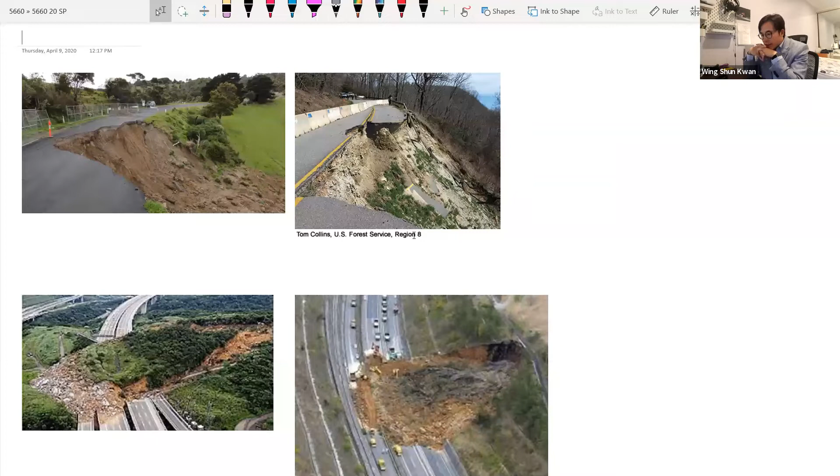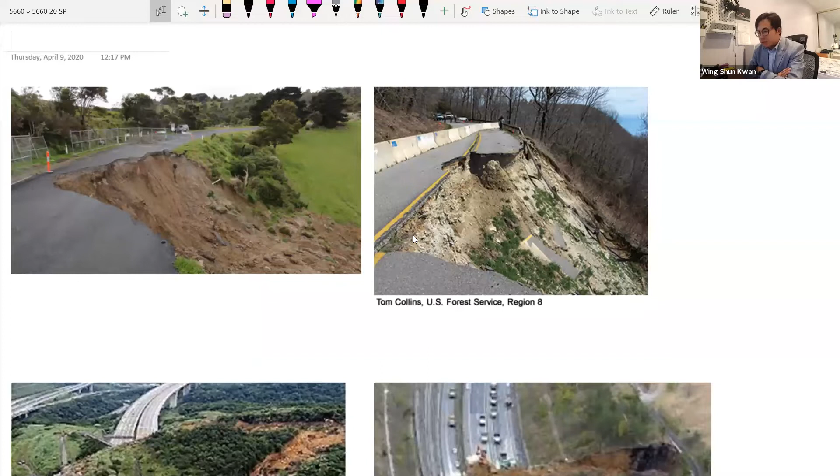On the slide I show some pictures of failures, of what may go wrong. I don't have the site names for these, I just Googled them quickly, but I want to give you an idea of the scale of the mass failure. It could be a small scale slope problem, happening at your backyard, or on a small road out in the countryside, an area where the road malfunctions but there's no casualty or loss of properties.

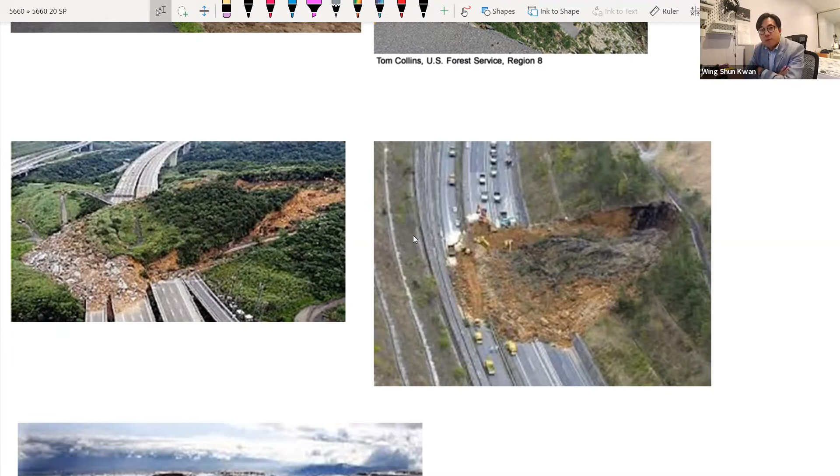This is also a huge concern in the mining industry, because at mining sites we push the limit. We want a cut as deep as possible to maximize profit. Mining sites are often very risky because we push the limit, wanting to go as deep and as far as we want, and as a result we get a very steep slope, which ends up failing.

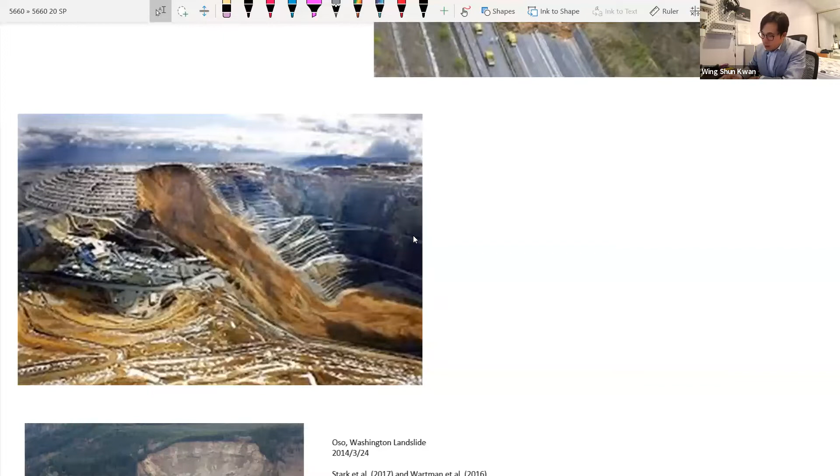I put up a case history for some of you if you want to read about it. On Canvas I uploaded two papers regarding a case history in the United States, a relatively recent one. It happened in 2014 in Washington. That was also the time I was doing my PhD at Texas, and everyone was talking about this case history when it happened, and I had a lot of time to dedicate to understanding what was going on.

In Washington in 2014 there was a landslide, massive enough that Americans, or people on the West Coast, really felt the pain of it. If you want to learn more about this case history, I uploaded two very well documented papers on Canvas, so feel free to read about it.

So now the question is: why did this happen? What is the cause of slope failure? So why does this happen? Any guess? Why does a slope fail? What would be the potential cause? Anyone? Any guess? Just because it's old enough and it fell?

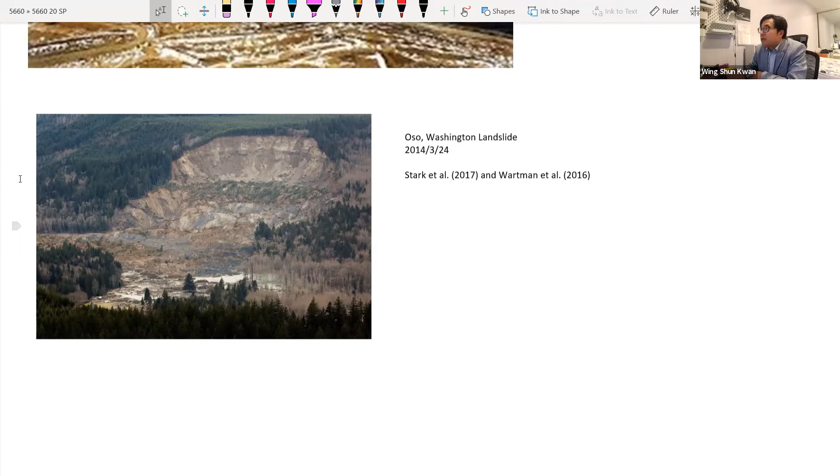And loss of strength - why does loss of strength happen? The ground is the ground, so why would there somehow be a loss of strength? Anyone? The case history of Washington also happened after heavy rainfall.

Rainfall-induced landslides may not be much of a concern in Southern California, but it will be a concern in the northern part of the West Coast where there's more rain, and also in some tropical areas near the tropics, which get a lot of rain during the summer - that could be the concern. Yes, underground water table, very good.

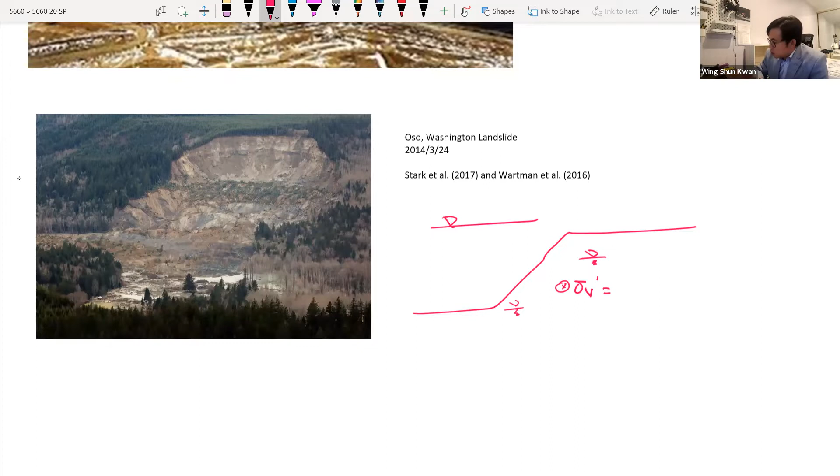When a lot of rain happens, the groundwater table rises. Let's draw a slope: if the groundwater table goes up because of the rainy season, the effective stress right there would change, because effective stress equals total stress minus pore pressure. So if there's a rise in the water table, will the effective stress go up or down? It will go down, right?

So if there's a rise of groundwater table, would the pore water pressure go up or down? It will go up, right? So if that goes up, what happens to your effective stress? It will go down. And shear strength is a function of the effective stress.

So if the shear strength goes down, your soil strength will go down too. Simply, if there's a rise in the groundwater table, that could also trigger slope failure.

This becomes a very typical geotech problem. No matter if you have a recent cut because of civil engineering activities, you're concerned about the slope. You need to do a slope stability analysis to design for earthquake scenarios, and because of changes in groundwater table, all these natural or mankind activities cause you to think about slope stability, and we need to do analysis on that.

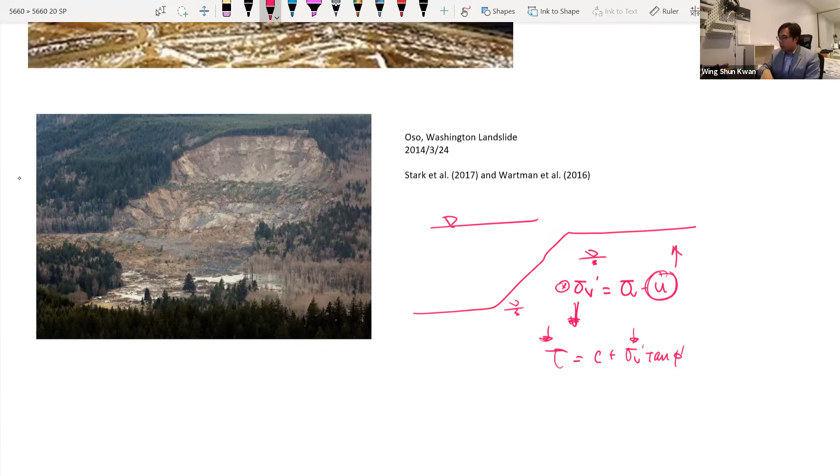So that will be what we'll be working on this topic.

So the best reference for this lecture is the Duncan and Wright book. Oh, I don't have it on my bookshelf here. But anyways, the Duncan and Wright book is a classic reference.

Wright is pretty much the one who redid the UTexas program, which is a very relevant computer package to do slope stability analysis.

But in this course, I highly recommend you understand the basics, rather than just diving into a computer package and doing a slope stability analysis over there.

I highly recommend you understand all the fundamentals, because the computer packages change. Ten years from now, there may be other types of software that come out, and even when you get into new software, in order to run the analysis properly, you need to understand the fundamentals.

You're given all these options, like different analysis methods: the method of slices, the Spencer method, the block method. You also need to input parameters, like undrained or drained strength parameters, and use either total unit weight or submerged unit weight, phi or phi prime, C or C prime.

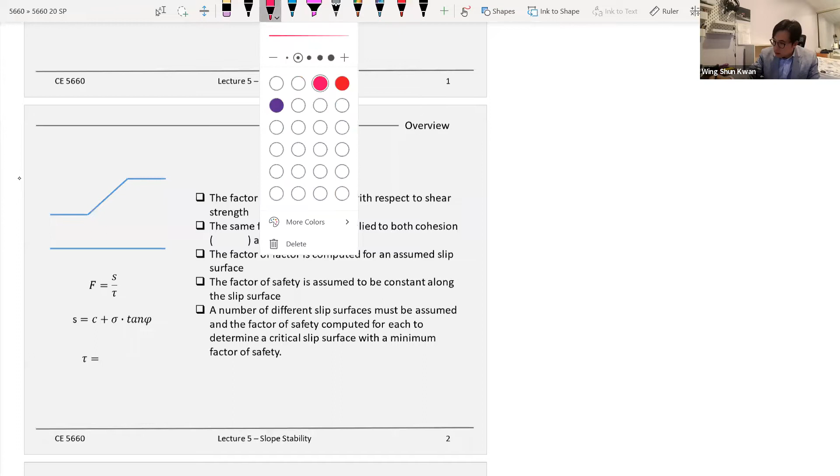A deterministic analysis means you define one case scenario at a time. So when a slope fails, you define one critical slip surface. It's a circular slip surface, which means you have a center point with a known radius. Yes, is there a question?

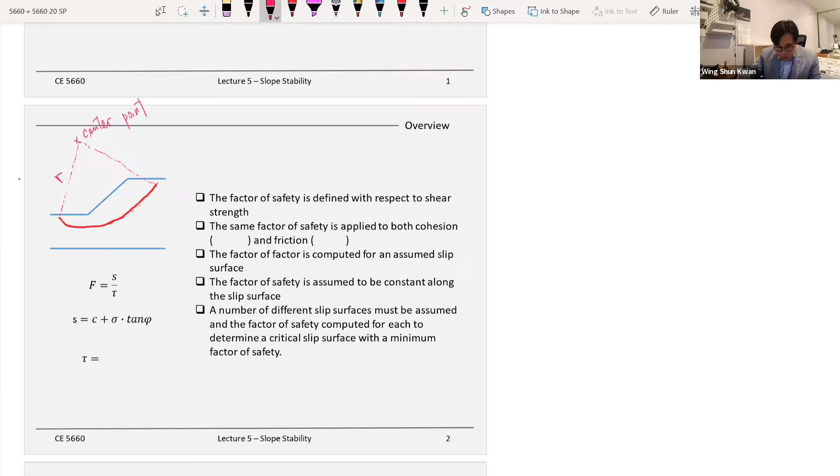So you know the radius, and this is your slip surface. We define one critical slip surface.

And we use a typical factor of safety type deterministic approach. So the factor of safety would equal the soil strength divided by the demand. The resistance is the soil strength divided by the shear stress, which is just the driving force. And for the soil strength, we can make use of the Mohr-Coulomb criterion.

But now it can get complicated, and you need to think about which kind of parameters you should use, drained or undrained.

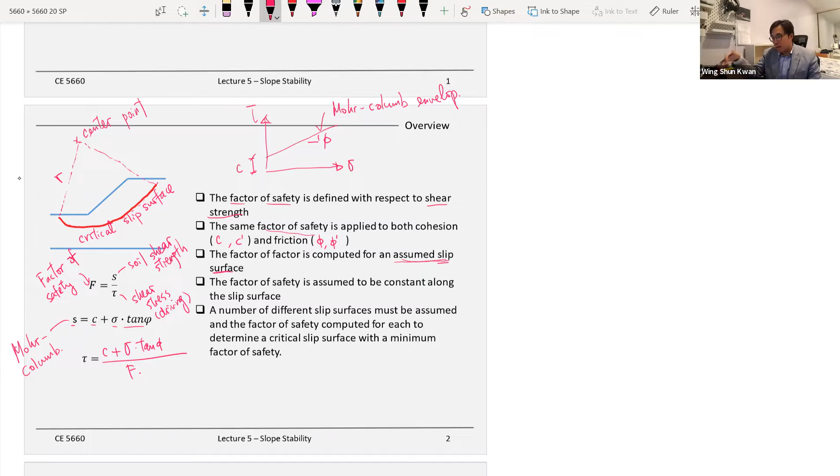There are some engineering procedures to handle this, we'll talk about this later. If you use any computer package, what they do is trial and error. They will try maybe thousands of different circles going through a site, and then identify the lowest factor of safety, and that becomes the critical slip surface. But if you do it by hand, there are some recommended procedures to do it. Before going into using any computer package, I highly recommend you understand the fundamentals.

What type of parameter you should use, and when you use the program, you have a bunch of different options to choose, which give you different methodology on calculating the factor of safety, or how to create geometry and the failure mechanisms. Think about all this. So start from the basics, and then the next step we will do any computer aided analysis for this topic.

The other fact is we make simplifications. This is a deterministic analysis, so we just pretty much assume worst case scenario. We assume the factor of safety is constant along the whole slip surface. And if you do it for practice, the procedure is you need to try a couple of different slip surfaces, until you find the critical one with the factor of safety to be the minimum.

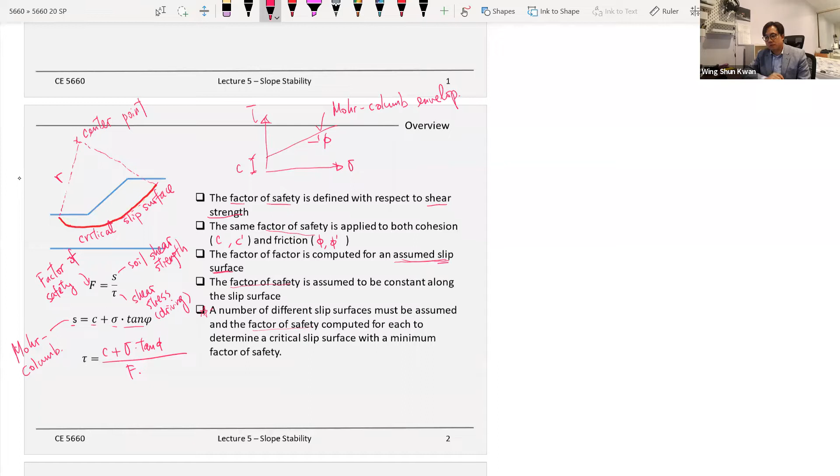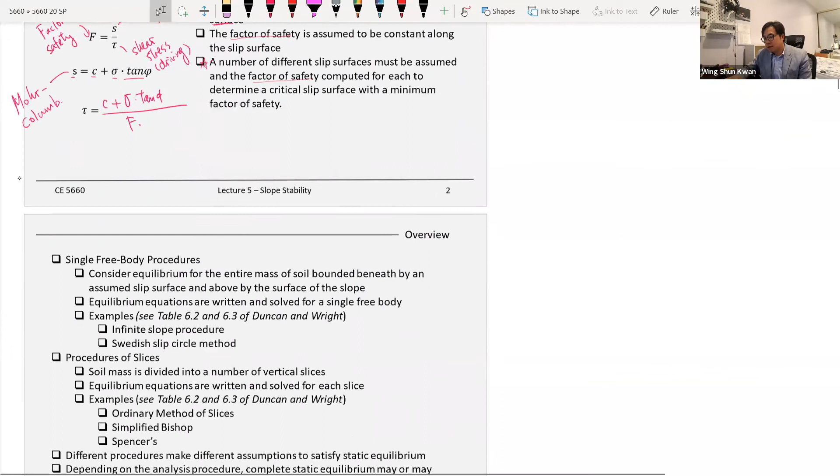So that's the overview of slope stability analysis. And the next thing we need to talk about is, in fact, there are many different procedures, different approaches to do it. So geotech engineers should go beyond this, just become equilibrium static problems, understanding that each different procedure has its assumptions and shortcomings, and to know which one to use.

When you do it by hand, you pick the most suitable one, and if you do it through a computer package, you need to understand which kind of approach you choose. And when you write a geotech report, you cannot just say I find the factor of safety to be 1.5. You need to tell the whole story. The factor of safety is determined by what method, through which computer package.

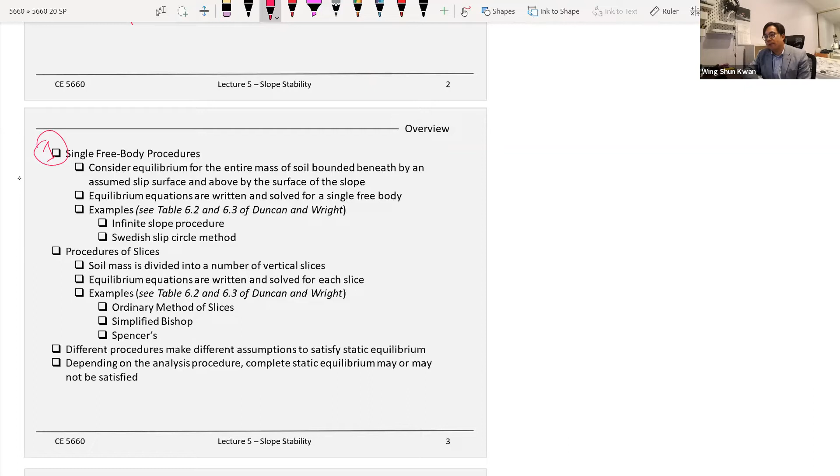Which means we need to understand each of the procedures, and there are many of them. But we can kind of characterize them, the category of them. There's two main kinds: first is the free body, single free body procedure, and the second category is the procedure of slices. So there's two different main approaches, and from those two approaches, there's many different methods.

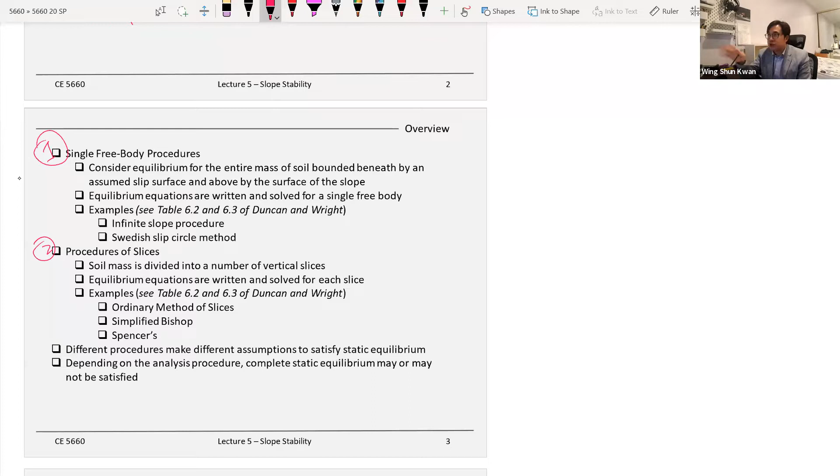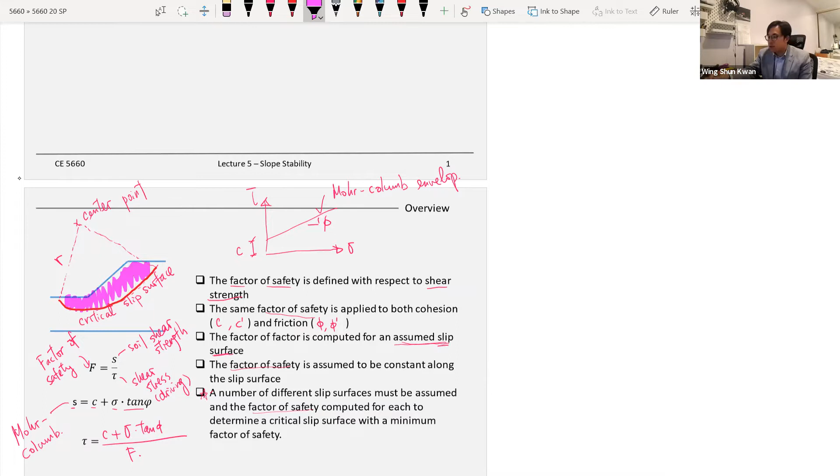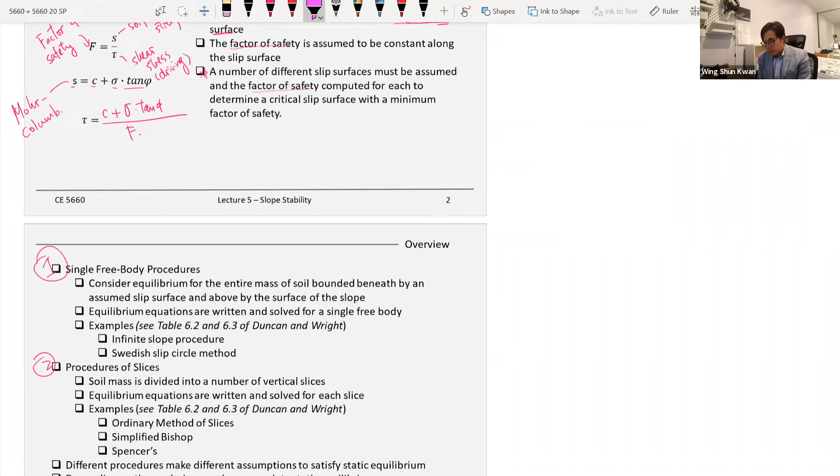So first, for the single free body procedure, you assume the whole mass, the whole mass right here. The single body means this one, the whole mass here above the critical slip surface, they move together, they move together. So you consider equilibrium conditions of the failure. Assume the whole thing moves together, and also this type of procedure, the equations are written and solved as a single free body, kind of like the static problems that we have been working on.

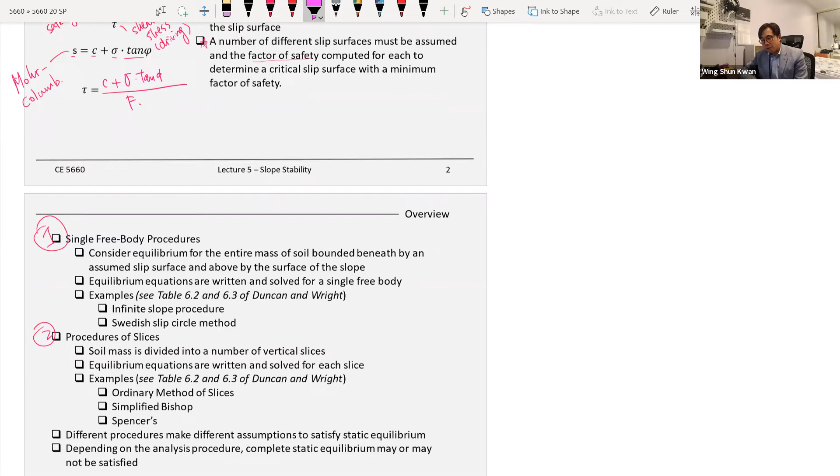And there's a different approach. First, the first approach, or this methodology, is the infinite slope procedure we'll talk about next, or the Swedish slip circle method.

So Northern Europe has the famous geotech problem, quick clay, which is a very weak soil, across the country. That's why in the early days they were at the leading edge of studying the strength of soils and slope stability concerns. If you go to YouTube, you can search for quick clay. Maybe next lecture I can play a quick clip together and watch some failure case histories. When it fails, it's quite dramatic. The whole site just falls down.

The Swedish people, in the early days, had a lot of engineering procedures and were at the leading edge on this matter. They developed a method using the single free body procedure. They call it the Swedish slip circle method. We will talk about this too.

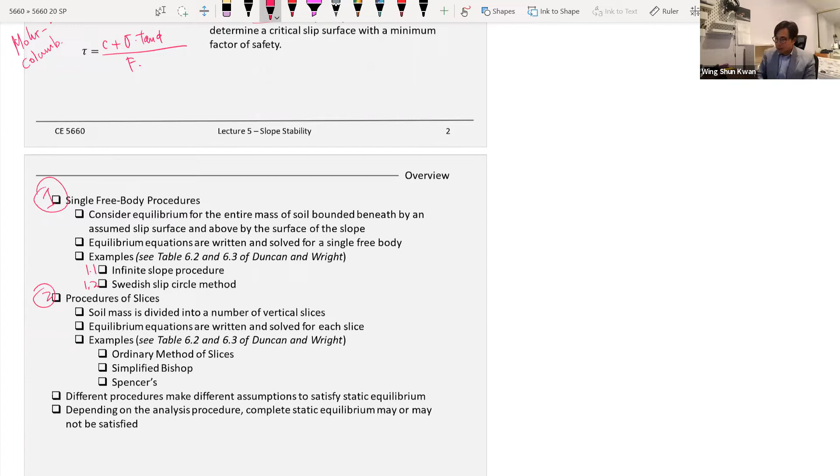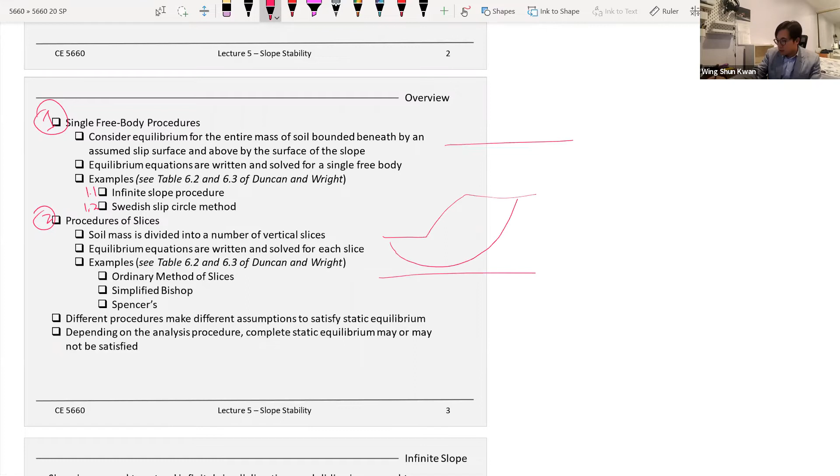The next general procedure people use is called the method of slices. The nice thing about assuming the whole circle as a single free body diagram is it's pretty much a straightforward procedure - you assume the whole thing moves together. The method of slices instead cuts this into different slices for equilibrium analysis. They have vertical slices, and equilibrium equations are written for each slice.

The advantage of the single free body procedure is it's simple, quick static analysis with a quick answer. In the early days, before the computer era, maybe the 1910s or 1920s, before even World War I, everything was done on paper. So the single free body procedure made sense then.

But when computers started kicking in, even before conventional OS systems, when there were punch cards and DOS systems in the 40s, 50s, even 60s, the computation power picked up. Then this type of iterative procedure, where you find the equilibrium from one slice and move to the next, passing on the static equilibrium calculations, became feasible. Then the method of slices became more and more popular.

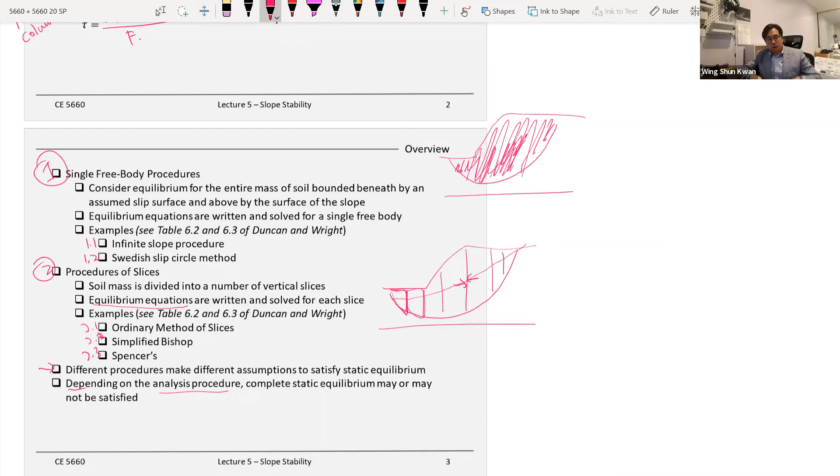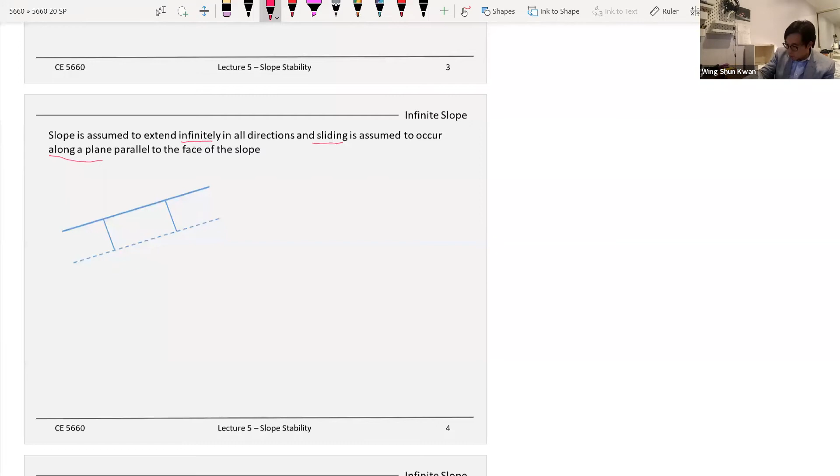First, let's talk about infinite slope. Infinite slope is the assumption we use when failure happens in a layered type of situation. It's assumed to extend infinitely in all directions, and sliding occurs along a plane parallel to the face of the slope. This only happens for cohesionless soil.

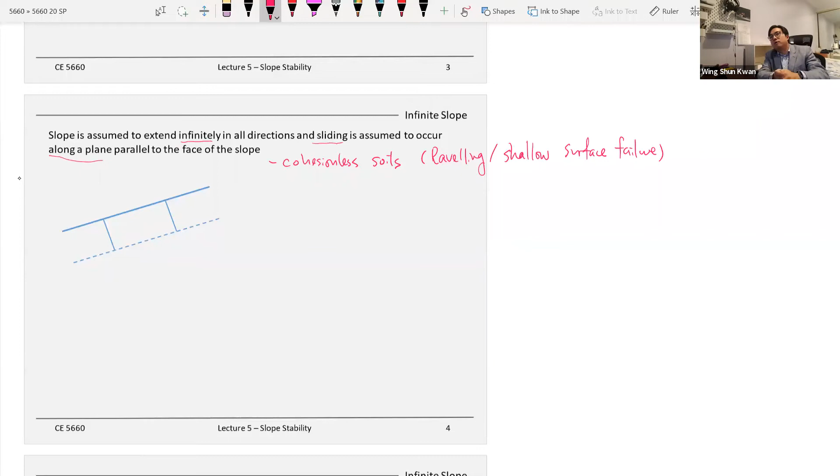So when you have sand and gravel, when failure happens, it could be ravelling or shallow surface failure where a layer of material slides off. This pretty much only happens for cohesionless gravel or sand slopes. When you have a clay slope, very likely you get a circular critical circle type of failure.

So for infinite slope problems, we can use this approach. That's why when you become a practicing engineer, if you have a clay site, this type of failure won't happen. So this is... I got a question there.

It could also happen when you have sliding parallel to the slope surface - the slope face. For example, a block of soil over rock. When you have a very smooth contact, the whole plane slides off. This approach can be used too, and very likely it's just cohesionless soil.

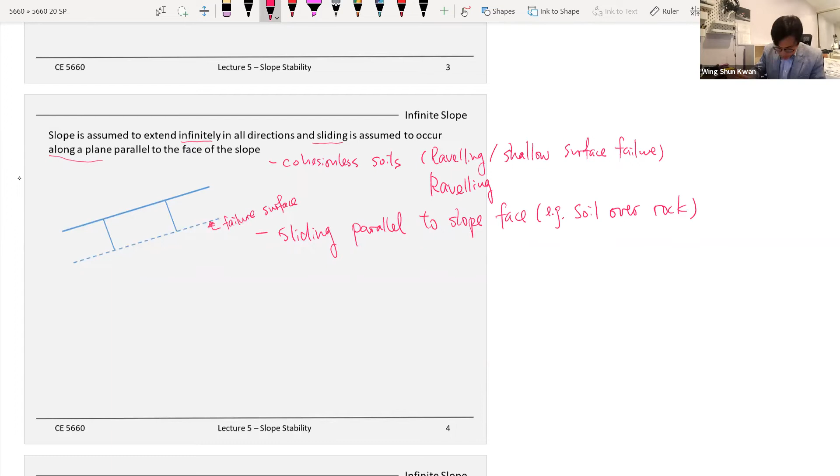All this slope stability analysis also depends on understanding how to set up this type of problem and the geometry. First, we assume this is the failure surface, coming with an orientation angle of alpha. We assume the whole diagram has a unit thickness, so the dimension going into the page is 1 unit. Now we just look at one individual block to simplify our problem.

We just look at one individual block. We assume this block has a weight of W, and we know the dimensions of this block - assume a dimension B right there - and we know the thickness, or height, of the block, and the unit weight of the soil.

We assume the reaction force on this block is N, and the strength comes from the resistant force that resists the block from sliding - the tension force, or friction force, between the surfaces where sliding would occur. We also need to know the reaction force.

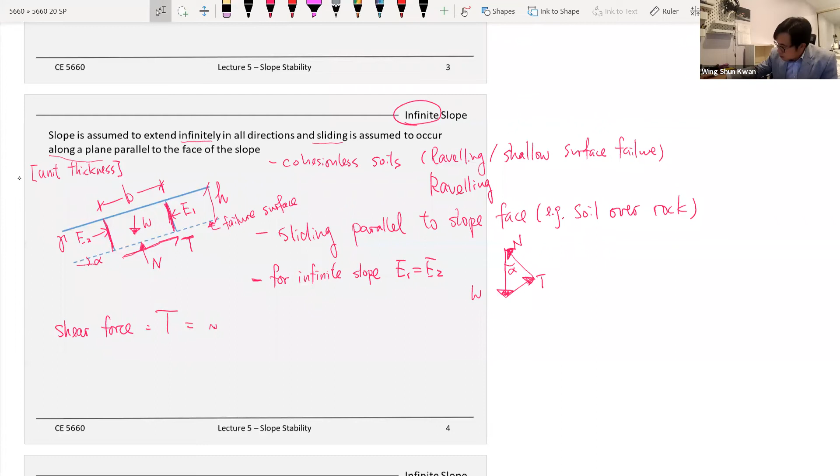So what's driving the slope to slide is the weight of the slope, the weight times sine alpha. And we can calculate the weight because we know the unit weight of the soil, so unit weight times the area or times the volume. Now we have a unit thickness into out of the page, so this is the unit thickness.

We also know the normal force. So when failure occurs, we get the friction force equals to the normal force times tangent phi.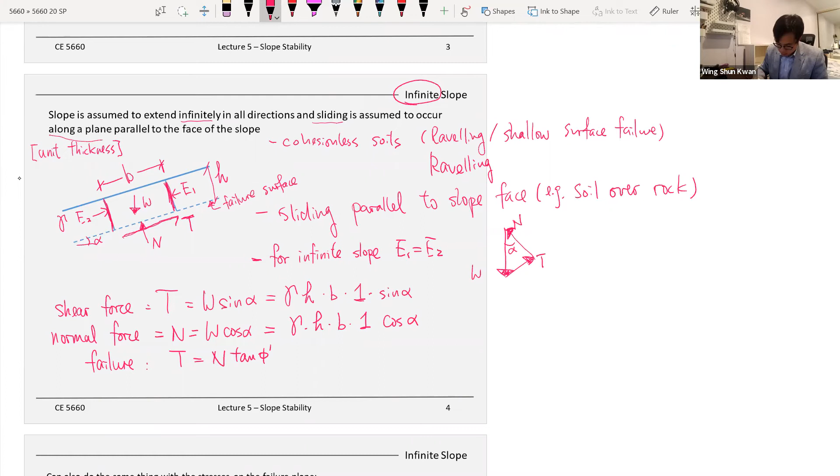So if we plug in those equations right here, the W sine alpha will be equal to W cosine alpha times tangent phi. If we simplify it, the tangent phi will be equal to W sine alpha divided by W cosine alpha.

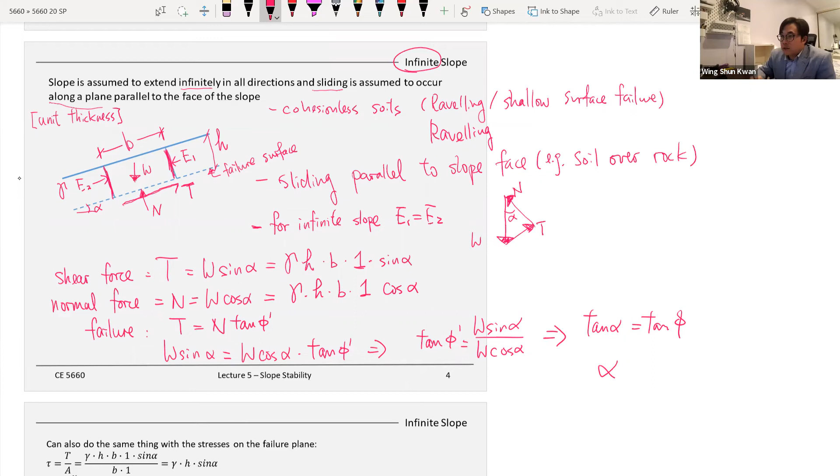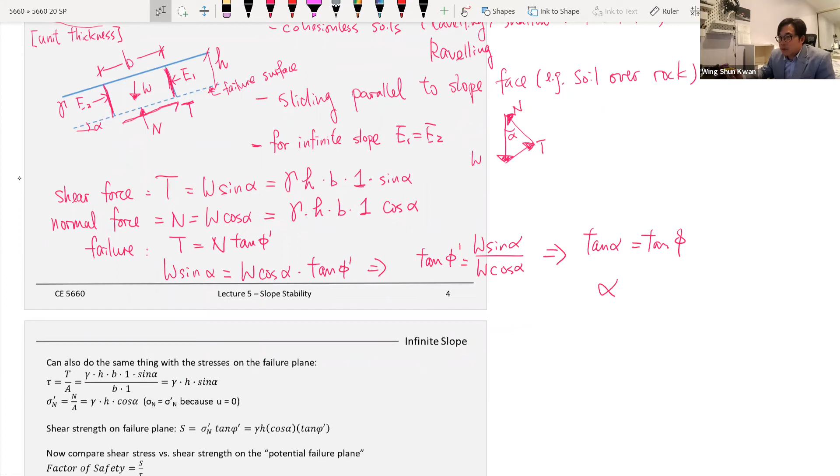Which means the tangent alpha equals to the tangent phi. So which means for our orientations, my alpha will be equal to, or when alpha is greater than the friction angle, then failure will occur.

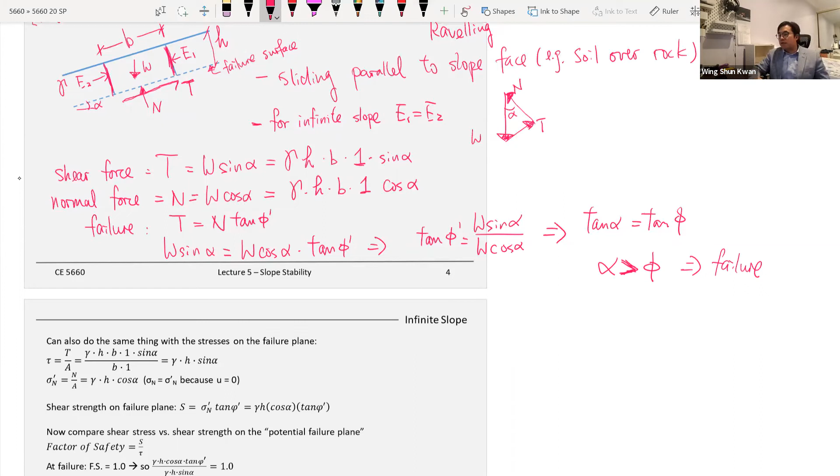So the concept and methodology of infinite slope is telling us, by the free body diagram, and for the simple assumptions that we have an infinite slope, we don't take into account the lateral forces since they cancel each other. Under those assumptions, we would conclude that if the slope angle is greater than the friction angle, then failure could occur. So that's the simple analysis of infinite slope.

Okay, questions? You guys good?

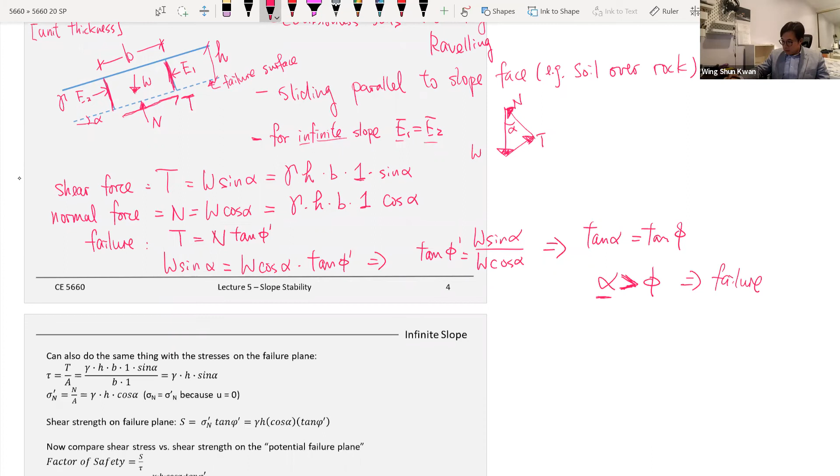And the other approach right there, very similar. I don't want to write the whole thing again, but when they calculate it, instead of a free body diagram, they calculate in terms of stresses. So they think about the stresses on the block slide that we mentioned. So the stress on it is the friction force divided by the area, and then they compare it with the normal force right there, and then they use the shear strength of soils equations.

This is the Mohr-Coulomb, with C equals 0 for sand or gravel. So they use the Mohr-Coulomb right there, and then they assume the potential failure plane, considering the factor of safety is the soil strength divided by the shear stress. So they call this the shear stress right here. So with this stress analysis, back calculating and assuming the factor of safety is 1.0, they back calculate the failure conditions, and then they get back the same thing.

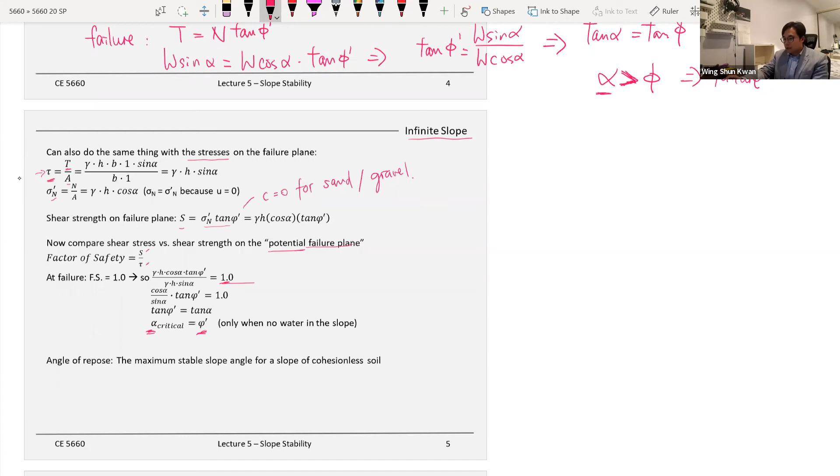So for this method, is phi equal to phi prime? Well, it depends on whether you're doing total stress analysis or effective stress analysis. So it does only work, this method gets simplified when there's no water in the slope. When you have water in the slope, then you also need to bring in the water pressure. Actually, it's a little bit more complicated.

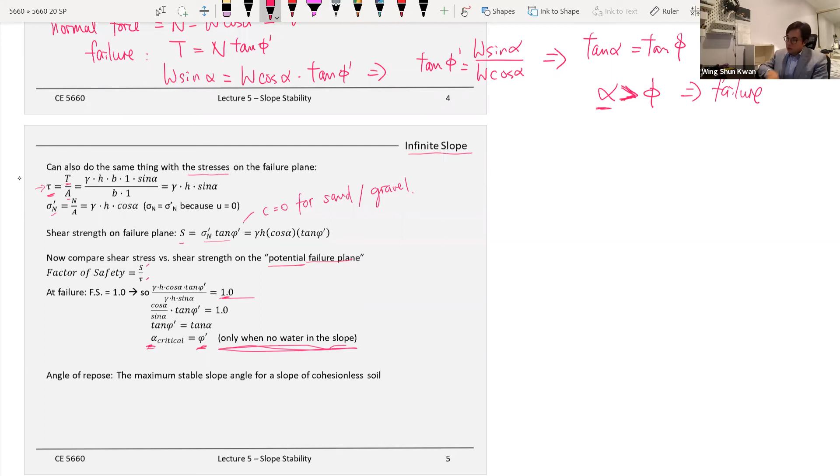So Tommy, I think you're right. For this method, it's for total stress analysis only when there's no water. When there's water, it gets more complicated. So when you have water, there will be an extra force right there. So you have your reaction force, and also you need to think of the water pressure adding on the slope. So it'll be more complicated.

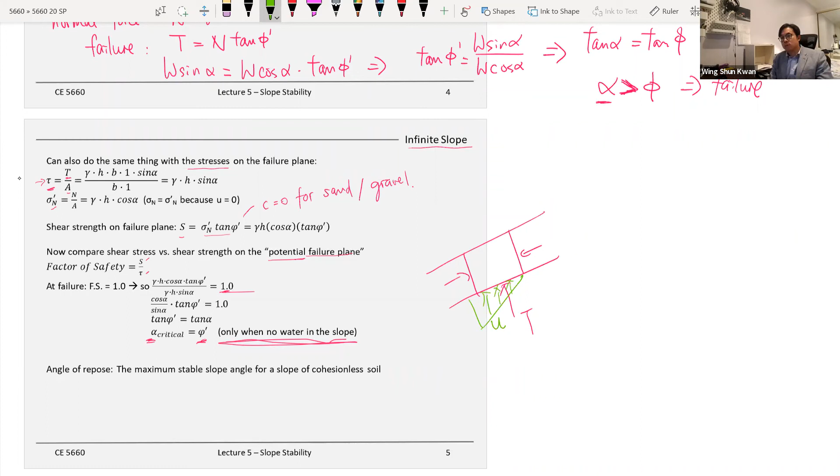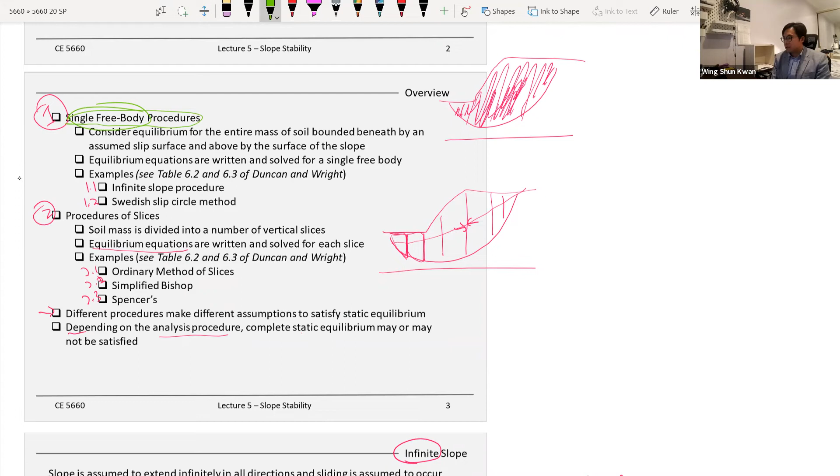Remember, when we talk about this, we have a different category. So we are at the simple one where we're just treating the whole sliding mechanism as a single free body, a single free body. So it works, as long as we are not breaking up the slide. Sometimes it works because the whole thing moves together.

But if you have a site, if you have a slope like this, so this is a failure plane, and if you have a slope that has different material that looks like this, this could be sand, this could be gravel, this could be sand, and if you want to use the method of the single body method, that would be much more challenging, or much more questionable whether you can use this method, because if you're treating the whole failure block as a single body, but you have different materials right there, then it becomes a concern.

So that simple procedure is nice, the method is simple, and the concept is simple, but as a geotech, we need to understand all the limitations and all the assumptions behind it.

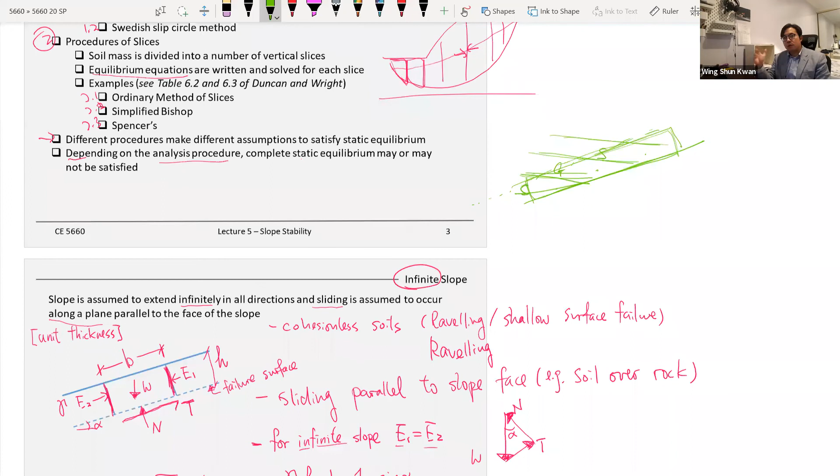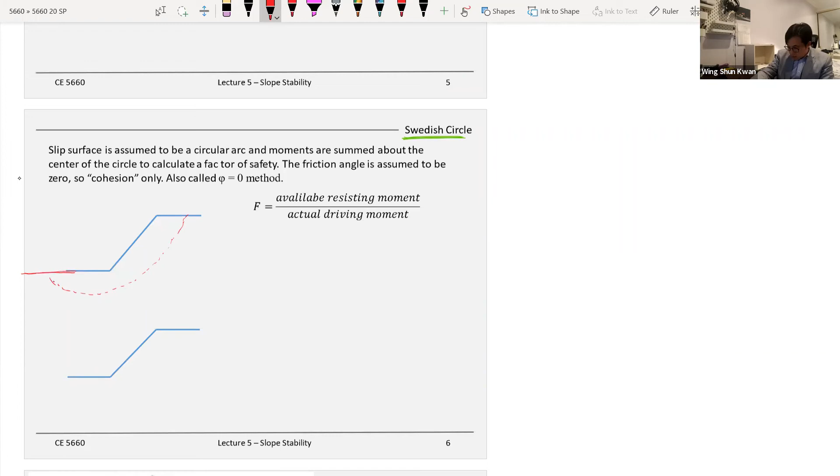Okay, next is still the same single body method, but now this method is the Swedish circle, and we assume we have a slip surface. So when we fail, we assume there's a critical slip surface. The slip surface is assumed to have a circular arc, which means we can identify the center and also the radius.

So this is the center, and also the radius. We assume we know this circular arc, and then we can calculate the moment about the center of the circle, and knowing the moment we can find out the factor of safety. The friction angle is assumed to be 0.

So for this Swedish circle method, it only works for clay, so it only works for cohesive material. Alternatively, this method is called the phi equals 0 method, because we only consider the cohesion.

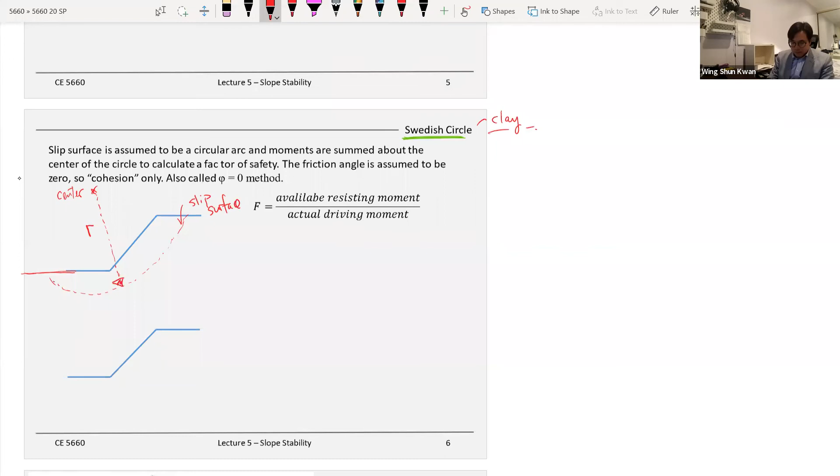So we have the slip surface right there, and we assume we know the geometry, so we know the length arc. And since we defined the circular arc, we can identify the center of mass of the circle, which identifies the weight of the whole slide of the whole circle, and we will know the distance between the center of mass and the center.

So now it becomes a single body, the whole thing is a single body, and it becomes a static problem. We solve this static problem by taking the moment to the center. So we consider two moments now. The moment of the driving moment, so the driving force for this type of problem, will equal the force times the moment arm. The force is the weight, and the moment arm is the distance from the weight to the center, because we are taking moment to the center.

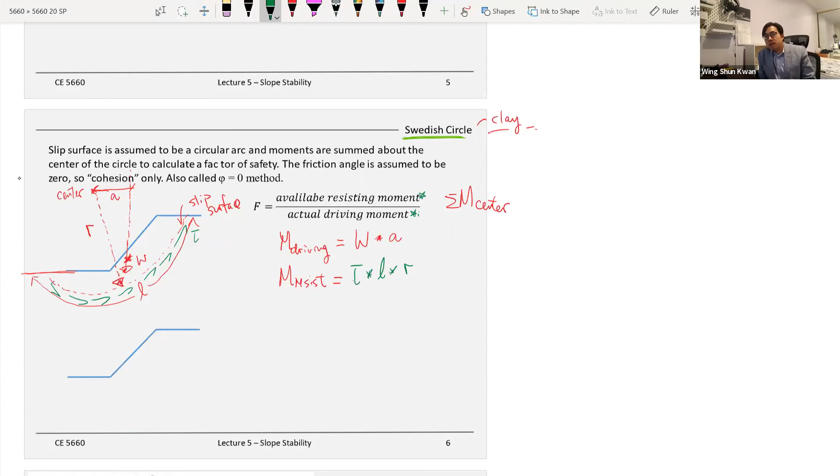Things can be very complicated. In the first lecture, when we get started, we just start at the most simple concept of methodology. Some of you may have seen this already, if it happened in your undergrad education, a 4000-level senior slope stability course. But if you only took foundation design without any slope stability analysis experience, this could be new. So I start from the most simple method, the single body method, and for clay it's the Swedish circle.

There's a question: how many times do we recommend running this test to develop the factor of safety? Very good question.

We should look at this with or without a computer. With a computer package, they use trial and error, however many times it needs, maybe 10,000, I don't know. So the computer code keeps trial and error until it has a tolerance smaller than the threshold that you set.

They try it if they have grids, you set reasonable boundaries of the grids within the site, so they try all those points. They will have almost an infinite number of circles until they find the smallest factor of safety. That's with a computer. Without a computer, there's some recommended procedure for you to try this. I would say maybe five to six times would be very reasonable.

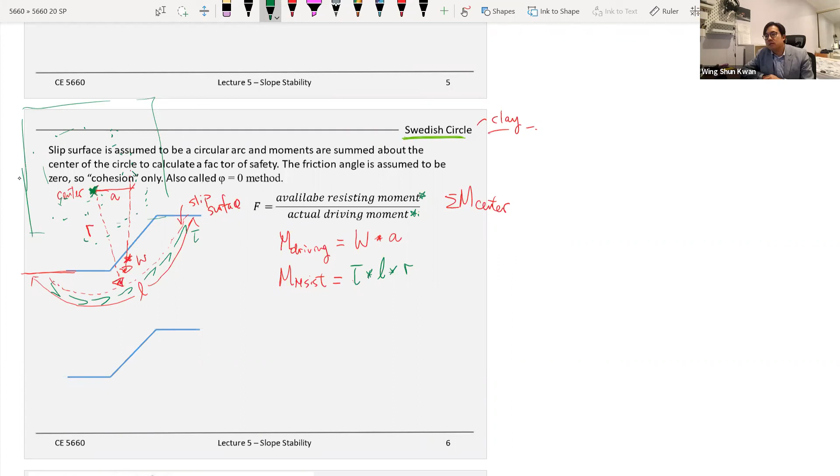We're talking about the slope. So the fundamental is this. The deal here is I wish everyone to understand the fundamental, so when you use software packages in the future, everything makes sense to you.

Another point is you never know what kind of computer package you'll have when you go to work, and those packages are not cheap. We may be teaching you UTEXAS, but at work you may have GeoStudio. We may teach you SLOPE/W, but at work it will be another kind. And who knows what new package you'll have five years from now. So it's more important to understand the fundamental, so whatever computer package comes to you, you understand it, or you can even develop your own.

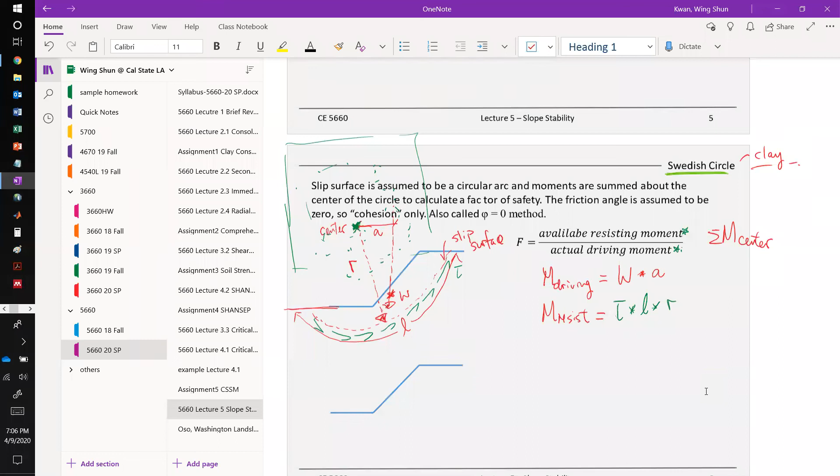I have some friends who develop apps for cell phones now, trying to make money from slope stability apps for field engineers to do quick calculations on site. At the end of the day, those are the static equations. If you're using the single free body procedure, it shouldn't be too bad.

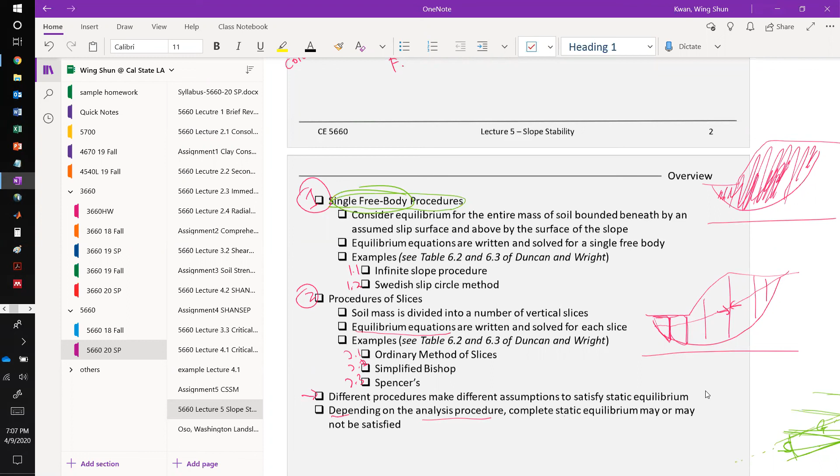At graduate level, as graduate students, I think you should be able to use MATLAB, Python, or even Excel to code an easy-to-use script to program the single free body procedure for slope stability analysis. But using the procedure of slices, it will be a little more complicated, highly depending on whether you can fulfill the static equilibrium.

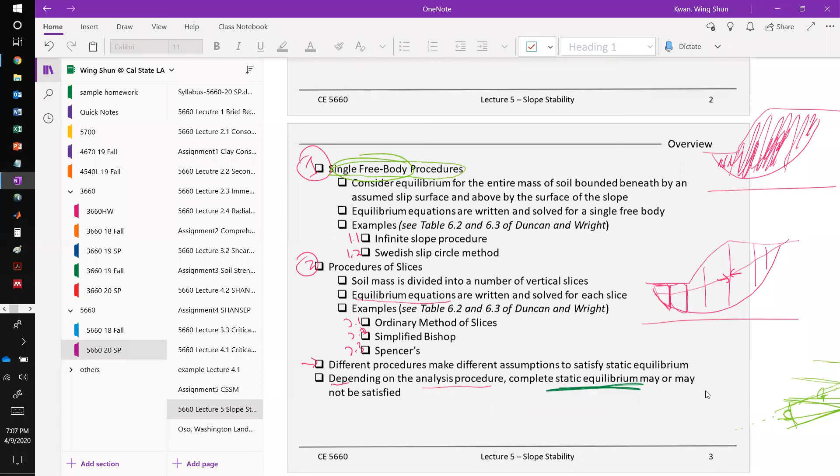Whether you can fulfill static equilibrium—we're going into details on that. So at least I think we can finish this slide.

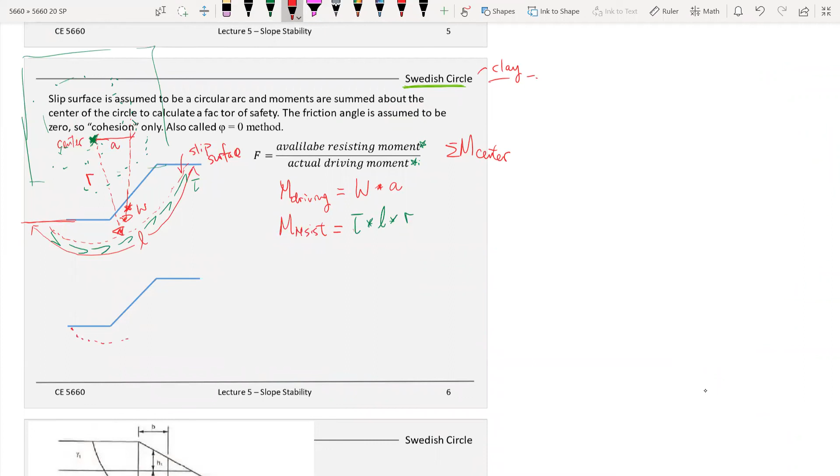This Swedish circle method has another capability—a little more flexibility, which makes this method a bit more powerful. In fact, you can discretize this critical slip surface. You can discretize the length based on the geometry.

For example, if you have different soil layers like this—I don't know how to draw it, but I'll try my best—so maybe if you have different soil layers, it turns out you have different soil cohesions and soil properties. Then you have a little flexibility to do this analysis.

Because at the end of the day, if you plug in these equations, the factor of safety will equal the resistance—which is the shear stress times the length times the radius—divided by the driving moment, which is the weight times the moment arm.

So if we try to break this into different layers, the moment of resistance, or actually the factor of safety, could equal these summations. The radius is the same for each term—it's constant because we're still talking about the same circle, the same slip surface. So the radius is the same, but the summations of the properties will be different.

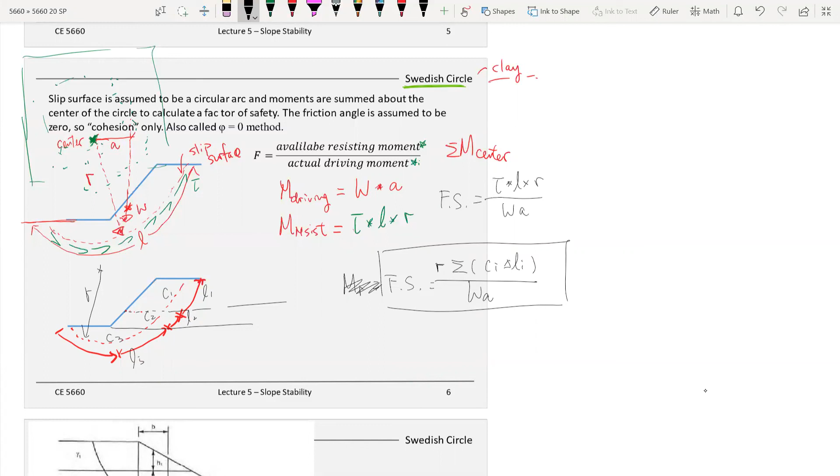So we can do it this way for the Swedish circle method. This is a single body procedure again, but the nice thing here is it gives us the capability to break it down into different segments. That's one example.

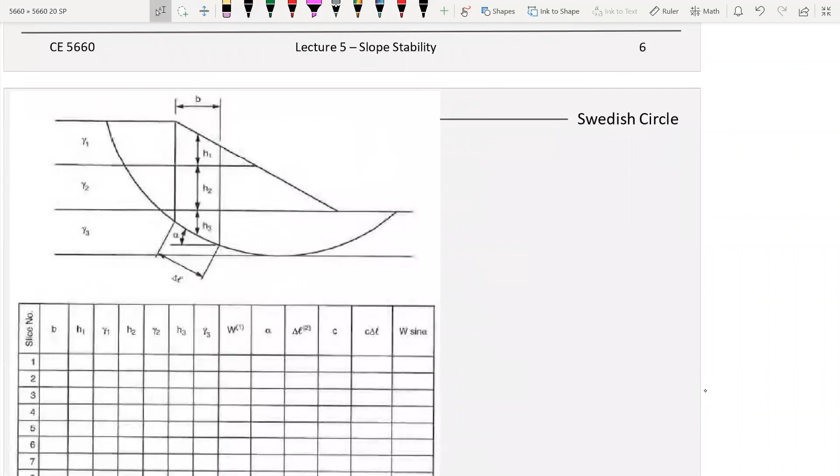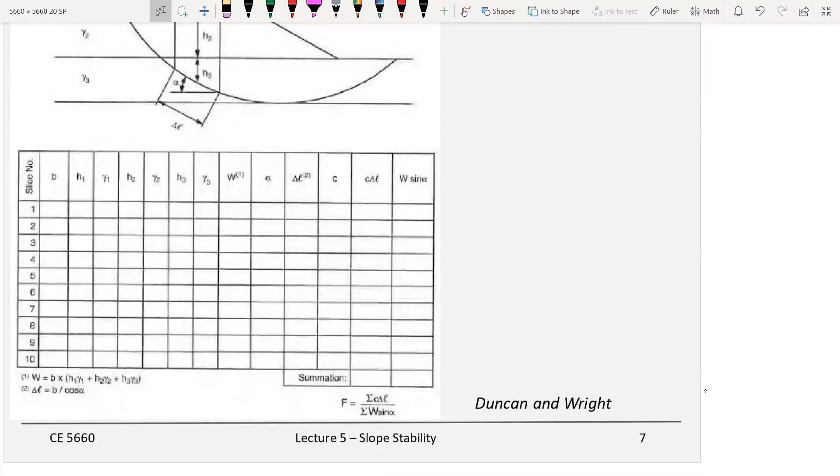Back in the old days before computer programs—like I mentioned about computer programs—this spreadsheet is the computer program. So you have different, well, they call them slices, but don't be confused.

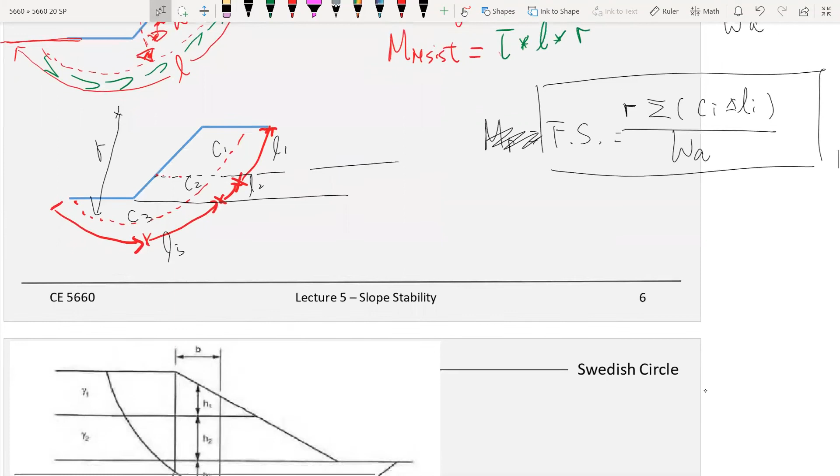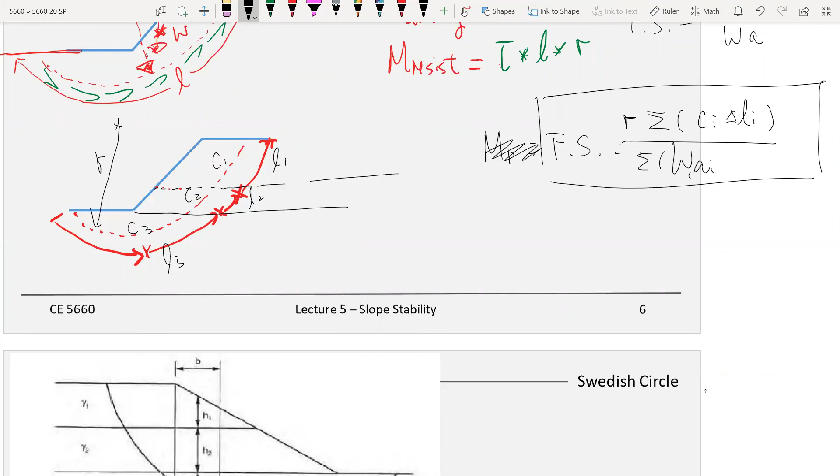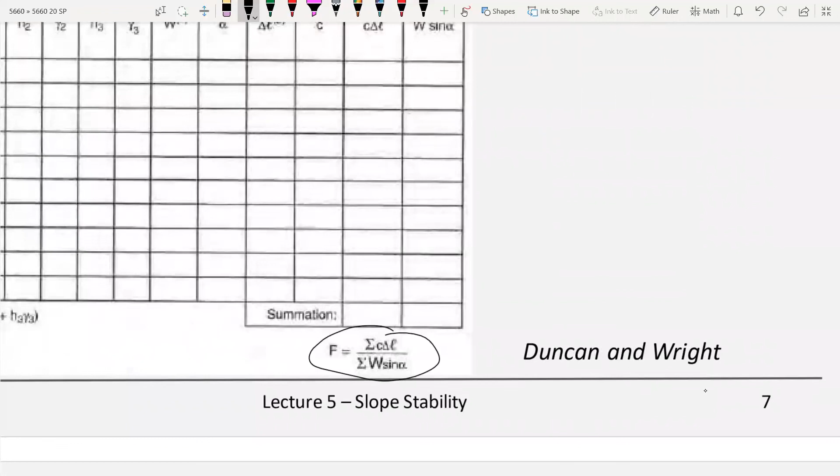David asked a question like each—oh yeah, you're right, it has different moment arms. So this will be different weights and different moment arms, and this will take care of the moment arm back within the equations right here.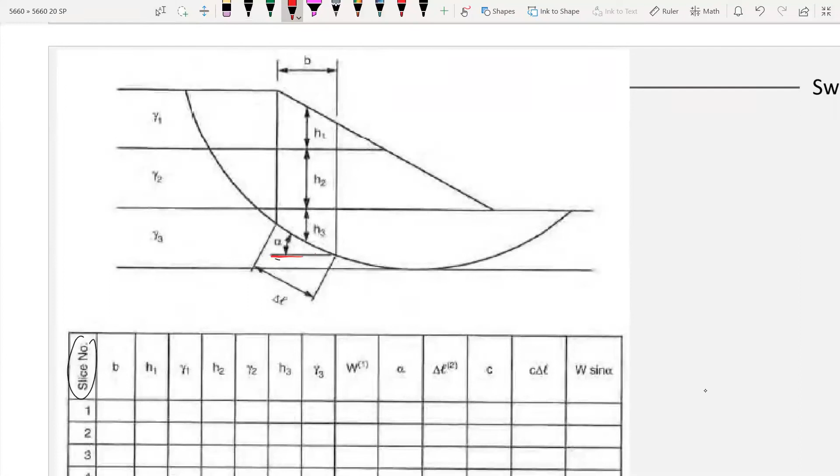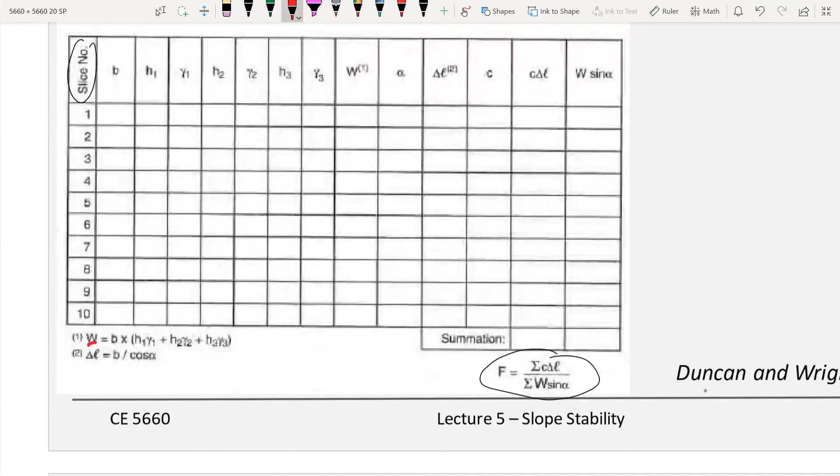Back in the old days, this was the software people used. So when you have different lengths of each segment, and on each segment you have different orientations and define the thickness, you come up with this kind of procedure. So you can define the weight, and then you can define the length of it.